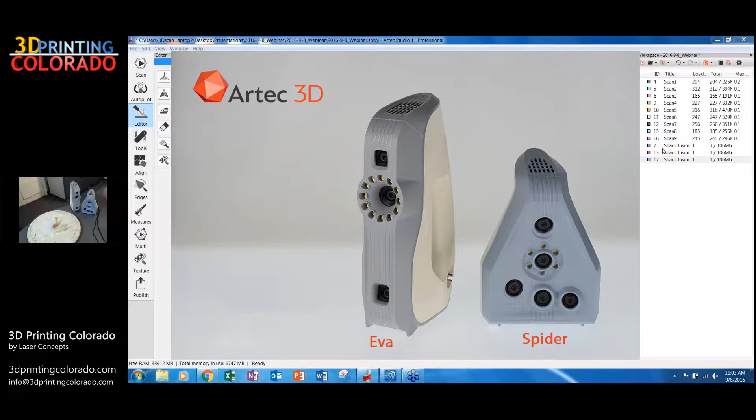So Stu, why don't you start off with going through the cameras on the scanners and kind of letting everyone know what they do and how the scanners work. Absolutely. So hopefully everyone can hear me okay. As Matt said, we'll be working with the Artec scanners today. Over here we have the Artec EVA, and right next to it the Artec Spider.

The Artec EVA is a two-camera system. The top camera here is its texture tracking camera. These are our structured light scanners, and instead of using specific sized tracking dots, they actually use texture along with some pretty sophisticated geometry tracking algorithms.

So this is a texture camera or a color camera, and the lower camera here is the geometry camera, and then the center piece here with a ring of white LEDs that you'll see flashing on the smaller scanner that I'm going to demo today, that is the actual projector, which projects the grid of structured light.

Over here on the Spider, this is actually a 4-camera system, so you have 3 geometry cameras and a texture camera. The EVA and the Spider are very similar in functionality in terms of how your user controls are laid out. They both have user controls on the back here. Let me adjust the webcam so you can see what I'm talking about a little better. User controls on the back, so you can be away from your screen or away from your keyboard to more functionally scan.

Both are point and scan, line of sight scanning. The Spider scans in a blue wavelength. It's actually a blue structured light, where the EVA is a white structured light. Both have LED light sources on the front. As I said, the 4 cameras. This is actually our projector over here.

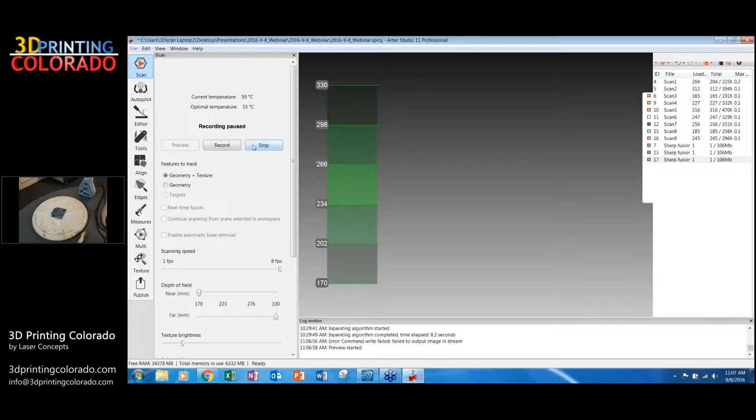And they are fully mobile. You can take them out in the field, and they do capture full color, as we'll see here in a minute. So I think Stu's going to scan that little block with the Spider. I am. That is true. Let me double check. I think I lost a connection for a second here. There we go. Just reseat that.

So while I'm doing that, the scanners are USB cable connected and have a separate power supply, both with strain relief, as you'll see on the back as I'm scanning. Here we go, initializing the scanner. Here we go.

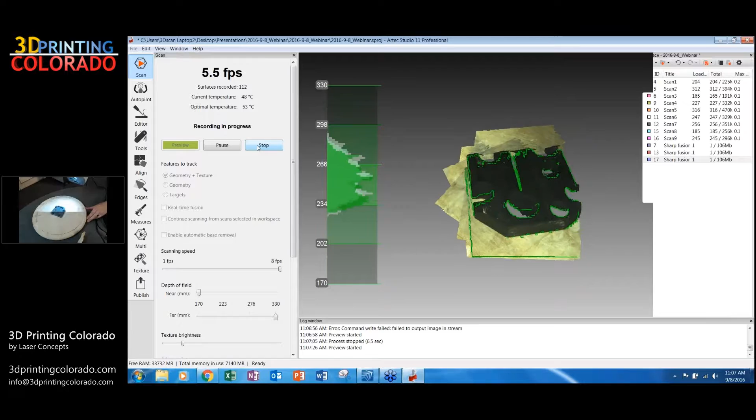So as I'm scanning here, you'll see a couple different things coming up on my screen, which hopefully you are all seeing just fine. On the left side of my scanning screen, you'll see a green bar that has some numbers and some variation in the color. The green bar is actually sort of a distance meter, and it's letting me know where I'm acquiring data and how far from my central focus point. That's more or less letting me know where I am in my scanning volume or my depth of field, if you want to think of things in terms of photography.

To the right of that is actually a sort of a preview of what I'm scanning, and within that you'll see there's a green amorphic blob, and that is actually what the scanner is bringing in. So I'm going to do one scan. We're using a turntable today that allows us to scan all the way around an object pretty quickly.

Turn that up real quick. Okay, and start another scan.

As I said before, they are line of sight scanners, so they're taking a couple different views of an object, which allows us to fully and accurately capture the geometry itself. The scanning process itself is much like spraying a car - it's a very smooth and often very quick process as I move around the object and fill in all the details.

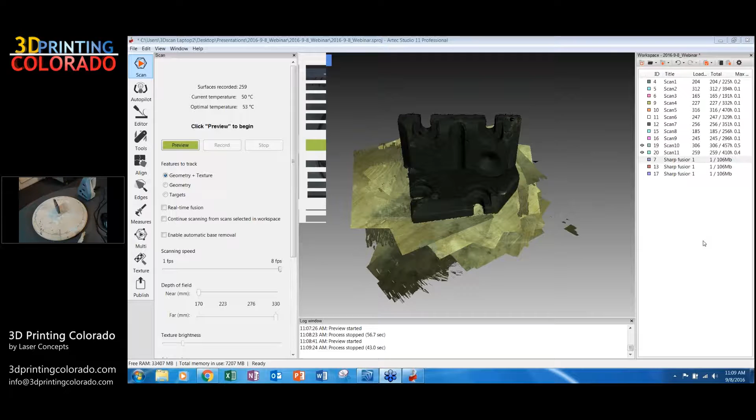Utilizing the EVA would be exactly the same as this. You can actually, as Matt said, use both in the same project environment. The EVA is just going to have a significantly larger field of view and not pick up as much of the fine details, but certainly much more of the overall size of the object, very quickly. I've got a couple scans here.

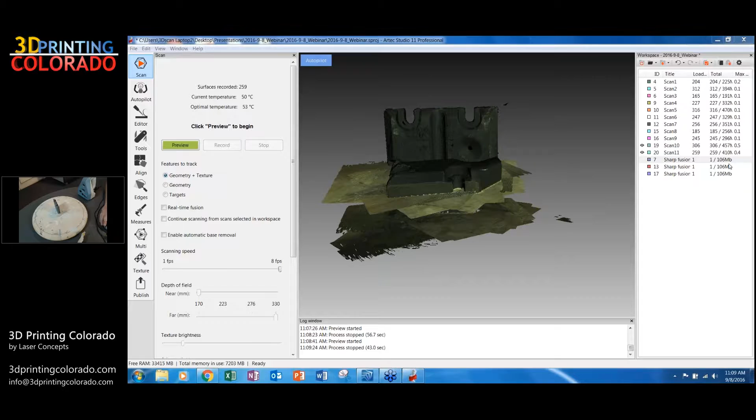This should be all I need for an object this simple. So I'm just going to run through it quickly in the latest version, Studio 11, which is what we're using now, which just came out early this summer. Artec introduced a method called autopilot to make scanning very, very quickly, and as a pro user of the software, it has made my job very, very easy.

So we're going to run through a couple registration algorithms, and then it's actually going to walk me through the process of turning these two sets of raw data into an STL or a PLY, OBJ, and so on. It's going to act like a wizard, similar to Microsoft Word, just walking me straight through with some prompts.

It also gives me really great feedback - I can click in here and it's going to give me some visual representations of what bad geometry or good geometry is. Since the scanner is primarily geometry-based when scanning, it wants to see things that are rich in geometry, with a lot of variation and very little symmetry, or at least variation in the symmetry - lots of unique geometry.

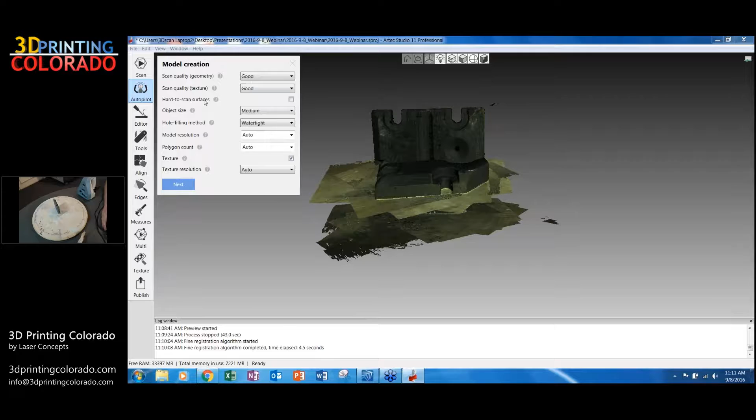So big flat surfaces are tricky, especially with something like the spider where you're only looking at about a postage stamp worth of data or area at the same time - it can kind of confuse one section of a flat surface with another. So it's going to walk me through some of that, object size, giving me some feedback.

And then it's going to allow me to put texture on this. Since we are taking full color pictures, I can make this a full color scan. Really wonderful if we're doing scanning for digital shopping - I'm thinking of scanning in full 3D models of consumer products and being able to put them up on a website and have people rotate them, view them, see things like that.

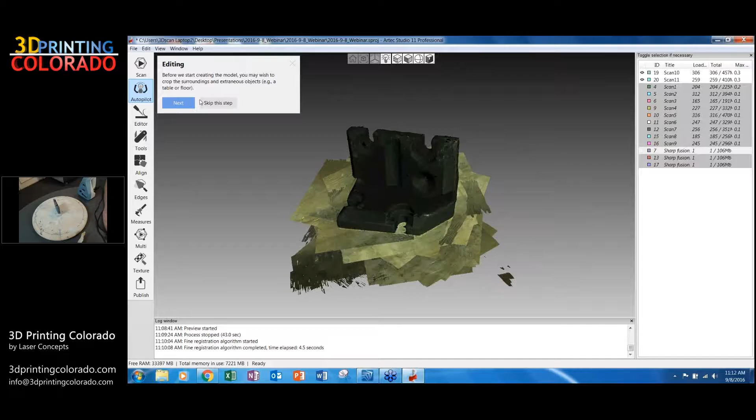I'm going to skip putting texture on this one because it's a boring gray block, and we don't want to watch a green bar go from left to right any longer than we absolutely have to. So once I have that done, I can click Next here, and it's going to prompt me.

One of the things we really feel Artec shines in is the data editing. Click here - when I captured this, I certainly captured a fair share of the turntable it was sitting on, and I don't want that in my data set. Using the editing tools here, I can quite quickly come in and use one tool that takes a sample and allows me to get a cutting plane in here. Easy as that - clean up the data.

I can come in and use my paintbrush to get a little bit more of that outlying data, a little bit of noise in the scan, just like that. Same thing with the other view.

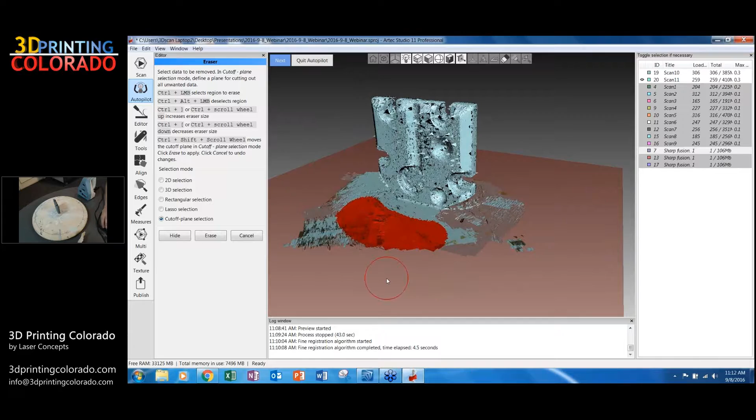In many other scanning softwares—Matt and I have been doing this for about 3 years and worked in many different scanning environments—this is by far the fastest we've worked in, and for that reason it's certainly one of our favorites.

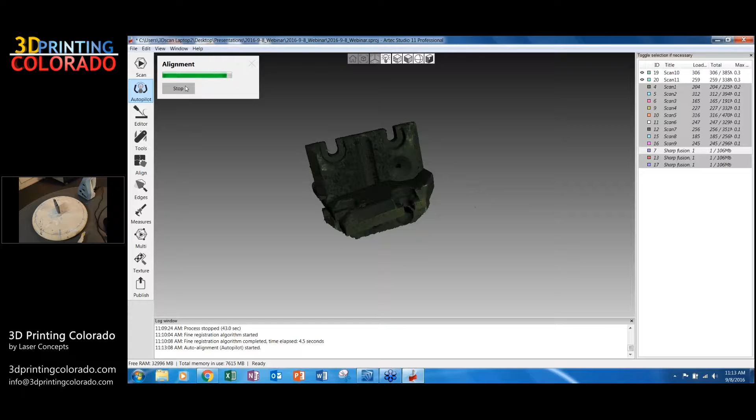This process, where Stu just spent 30 seconds cleaning this up, could take an hour or 2 hours with other scanners we've represented in the past. We're really happy, especially with the new updates from Studio 11 this year, with the auto alignment and everything else. It just makes it simple for the user, a little more intuitive.

You can also do this manually if you have tougher geometry. Sometimes the software struggles, but you can always do it manually—basically just connecting 3 common points between the scans and letting the software suck the scans together into your keystone scan. Each scan is its own individual color, so you can tell where you are in your project environment and what scan you're working with.

I'll actually show the manual alignment next. I'll do one more demo scan before we move on to the software portion. The autopilot has just made this process so quick and easy, especially for new users.

We had one of our fellow employees here at 3D Printing Colorado who was curious to learn scanning, and using Studio 11 and the autopilot, he was able to learn how to scan very effectively and efficiently in an afternoon. He can go out and use the manual tools that are walked through in autopilot because they're all still there, and you still have control over them instead of just a one-button wizard. It's a nice melding of keeping the skills and the data in your control, as well as doing a lot of the work for you.

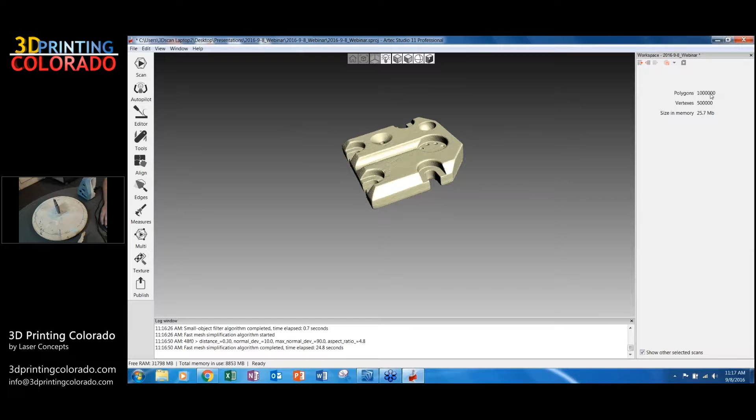So this is our metal block. We can see if I click into here, we're at exactly 1 million polygons. You can see there's a little bit of rough texture here—this is actually a painted block, so it has a lot of variation in its texture.

Stu, can you hold that up to the camera a little bit to show that all of those inconsistencies in the surface are actually in the block? That's not bad scan data—that's just exactly what the block looks like. Our high-def webcam here is not necessarily up to the task of showing it.

I can come through and actually scrub out some of these inconsistencies. There's quite a nice set of mesh editing tools within the program. I'm just going to use a smoothing brush real quick—I can come in and normalize some of this texture.

I can also use an automatic smoothing application here, though smoothing can run the risk of eliminating some features we may want to preserve. There's also a nice defeature brush, where I can go through and get rid of spots of data—this is a feature where I ran a cylinder down and out and through, and I'm just going to clean them up since we don't really need them in our next step.

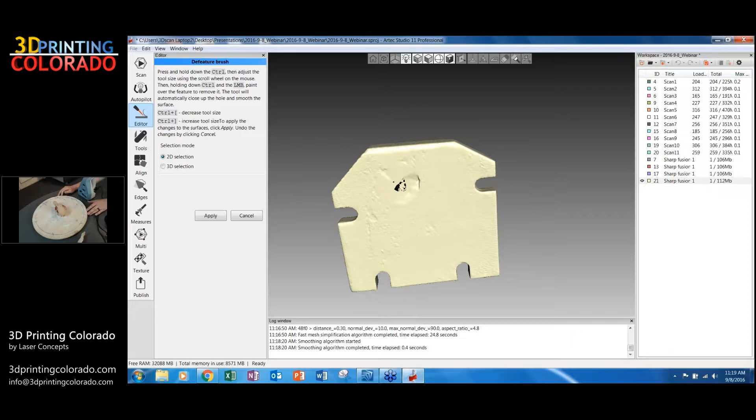Give that just a second to run. While we're doing that, I'm going to queue up the next piece here. This is actually a 3D printed hyena skull that we pulled off of data originally from the Smithsonian, I think.

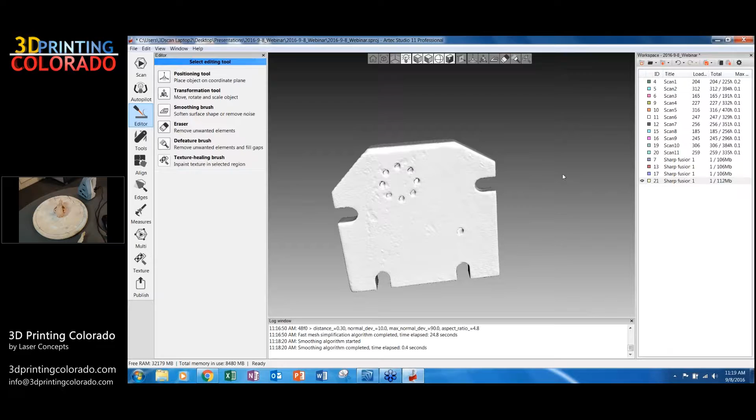So we're actually going to scan in this piece here. We've seen a lot of these scanners being used for scanning in museum collections, artifacts, and then 3D printing them so you can have them as hands-on pieces without worrying about damaging the original specimen.

So exactly like the block, just get to scanning here. Let the scanner click in.

As you can see, the scanners really don't care what they're scanning. The previous part was kind of a mechanical type of part. This is more of an organic kind of shape. The scanners are line of sight, they just really don't care what types of parts they're scanning in here.

Software's being a little slow. Often when we're running as many applications as we are, especially with GoToWebinar, it just lags behind a little bit.

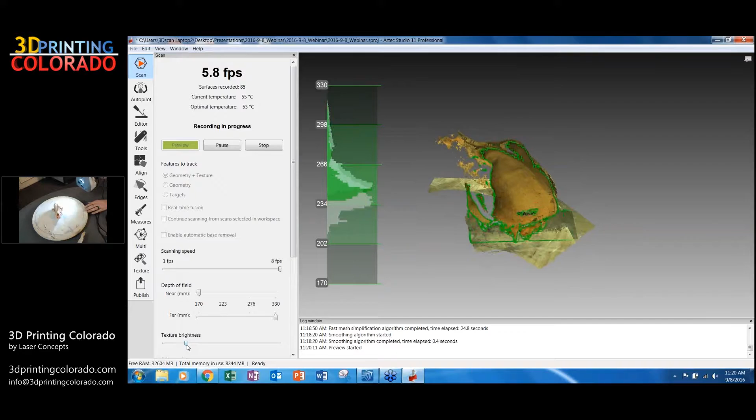I'm going to turn up my brightness a little bit just so we can see the model. You can adjust many different settings on the scanner. We won't get too much into that, but you can, things like digitally altering what would be your aperture, turning up the intensity of the LEDs to get around scanning things that are very dark in color, like plastic injection molded parts, or very bright, machined aluminum, things like that. So you have control of your scanner at nearly every level.

So we'll do a quick scan. Typical parts that are a little bit tougher to scan are shiny black parts, things like that, and machined parts, like machined aluminum parts. We have several workarounds that we work with, but the one that works pretty much the best is Walgreens foot spray. Just dusting it with some powder knocks down the shine, and you're able to scan the parts, and it just wipes off. So that's what we use.

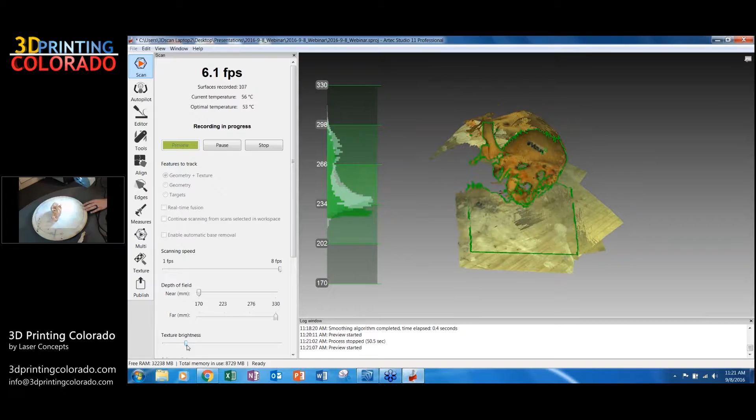Other people use children's paint, things that wash off pretty easily. But we found that the $2 can of Walgreens foot spray works pretty well for most applications if the part's a little bit too shiny for the scanner.

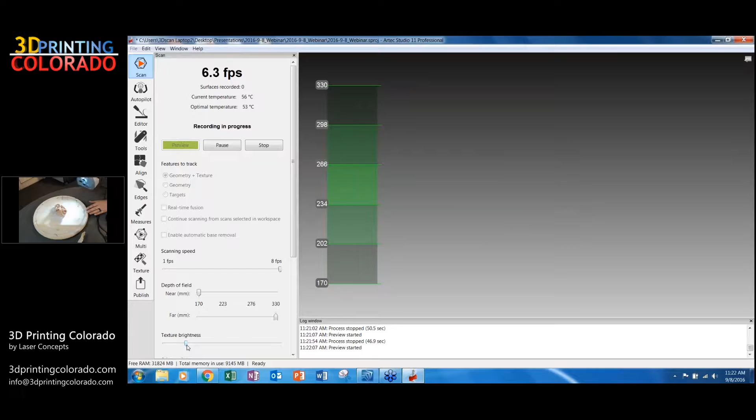So this one's a nice sample part because it has lots of nice little occlusions and hollow point spots and things that are very difficult to get the scanner down in. So it's a good piece to get lots of different angles on and show. Of course, the interior here of where the spinal column would have connected, we're not going to get all the way inside, so that's going to end up being a set of missing data.

I believe this scan was originally built with a CT scanner that the Smithsonian was using. But for show and tell purposes, this is a great data set.

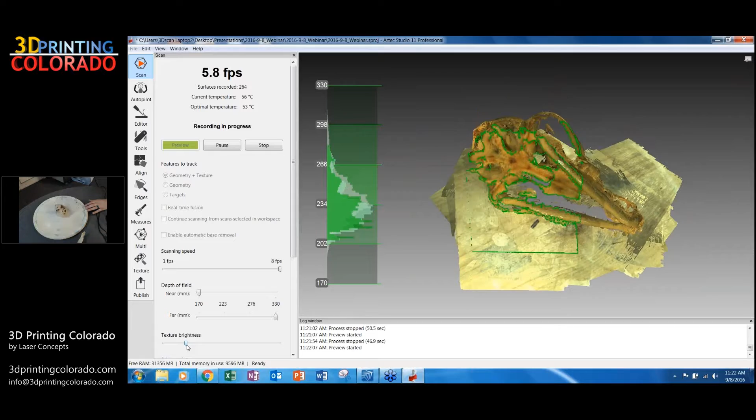For the tracking, as I mentioned earlier, the Artec scanners are full color scanners. They use texture as tracking. That's part of the reason why I have a raw wood grain turntable here, the scanners really love the variation in the wood grain. It allows me to scan hard, very symmetrical objects, and it can use the texture of the turntable as my tracking, so I don't have to alter an object or do anything.

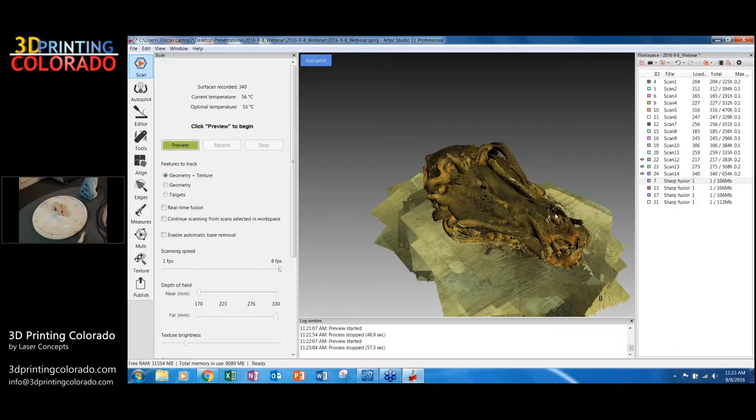This one certainly has plenty of geometric variation in it, so that's not so much a concern, but something more along the lines of this jawbone here can have some nice symmetry to it. Certainly not as much in the teeth, but some nice symmetry to it. So the wood grain helps with that.

All right, so we went through the autopilot before. I'm just going to run through the manual process and show it's all the same steps, just a few more button clicks. And click out of scanning, it's going to run our fine registration process.

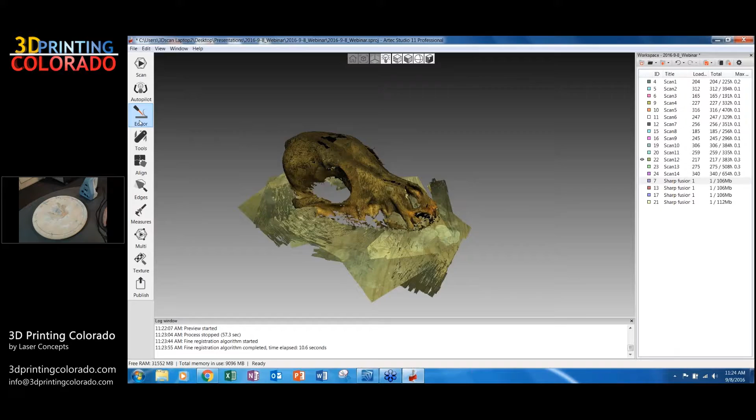Much of scanning is, as many of you probably know from the CAD world, just watching green bars go from left to right. Sometimes they're not green. In Artec, they're green. So we're going to skip right down to editor here.

Same tool I was using before. Quick cutoff plane. Actually, I'm going to skip back out, and I'm actually going to use the positioning tool. We scanned many different orientations, and if I turn on the grid, you can see that I am not aligned to X, Y, and Z. So I'm actually going to use the data that I want to delete, but it's nice and flat, so I can align this, at least get it sitting on the plane that I want it on, apply.

And now I can go in and quickly eliminate that data. Once again, that level of data manipulation is much slower in other programs.

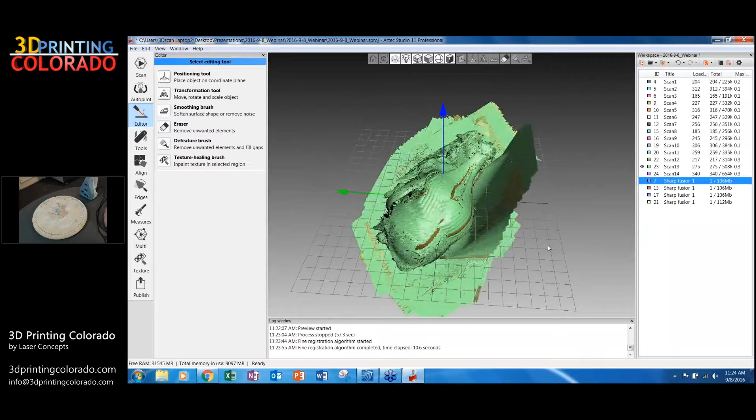And I don't have to do it with every scan because I'm going to use that first scan as my keystone when I go to my alignments.

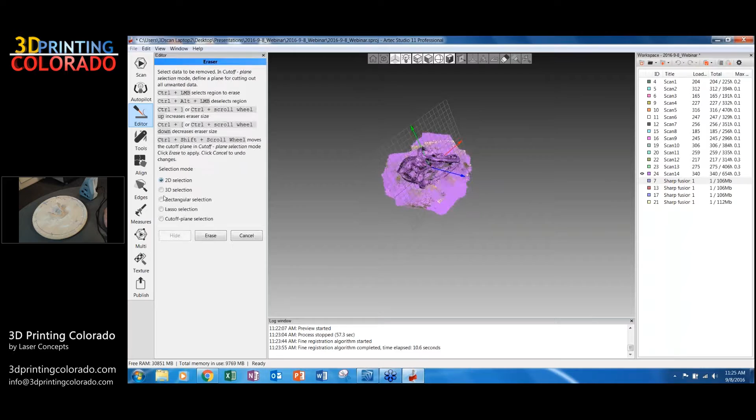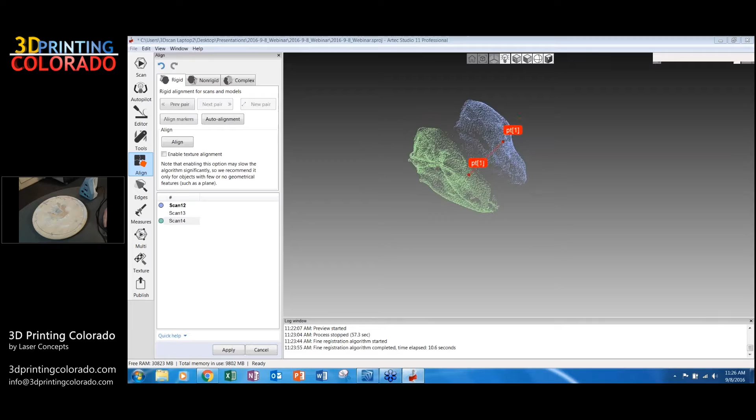Educational discounts on scanners, yes, there is a 10% educational discount for the scanners. So everything that you would need, depending on which scanner or a bundle, is included in a turnkey price. So you do end up saving quite a bit of money, roughly about $7,500 if you buy both scanners at the same time in a bundle.

Other things you're going to need is a license of Artec Studio 11. With the EDU discounts, you get free updates for 2 years. So any updates to Studio 11 you would get, but then also if you go into Studio 12 or 13 or the next updates on these scanners, you automatically get those for the next 2 years. With education you actually don't pay for the software. For EDU you get 20 free licenses of Studio 11 and then Studio 12 when that comes out.

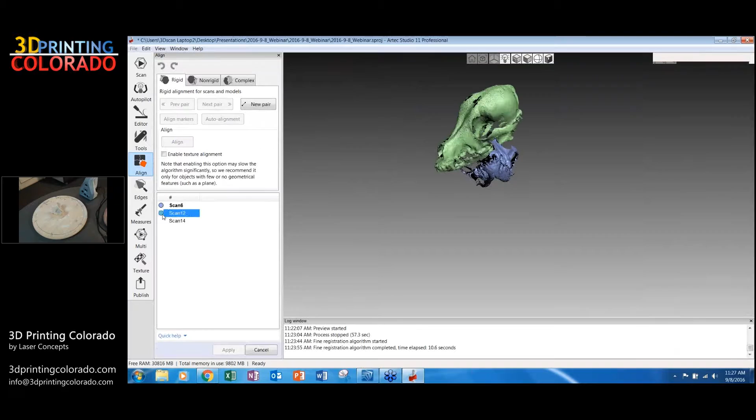So other than that, other than the scanners, you might consider a battery pack, which allows you to be mobile. And then install and training is always a big one. We either do that via GoToMeeting, what we're doing now, or Stuart actually travels on site, on campus, and that sort of a thing.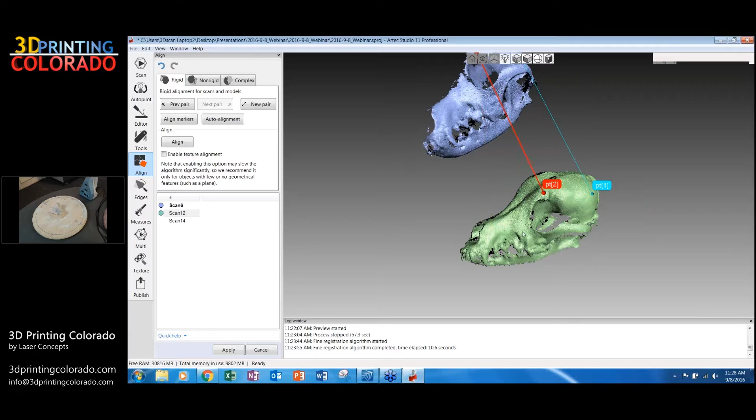Sure, I can show that. There's a couple different ways. In terms of distinguishing in the program, let me click over here. We can actually... let me get this running, and then I'll answer your question.

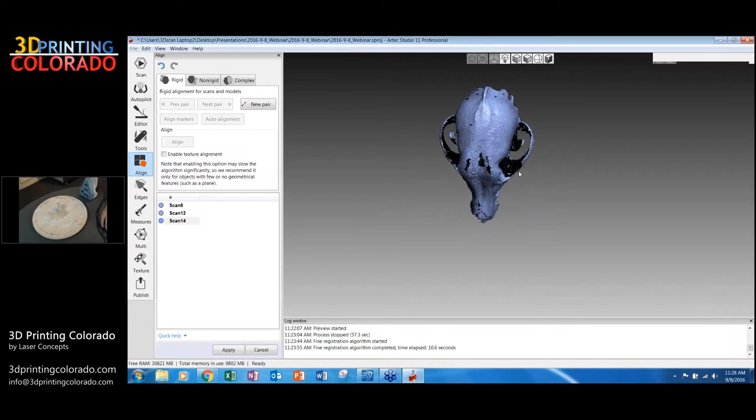I can certainly see if there are holes in my objects as I'm scanning. I can see through what comes up as black on my screen here, which is actually the back side of my polygons. The front side is assigned a color, the back side is just represented as black. So I can see it there.

I can also, if I close out here, and I'll actually hide these guys real quick. I can come in and I actually have the ability... it's up here, I can pick a plane and do a cutting plane. But Studio 11 is primarily built to show us the outside so we can get our scanning and get exported.

So what that really brings us to is our next level, our CAD software. And today we're going to be looking primarily at SpaceClaim. So I've got a few of these prepped already.

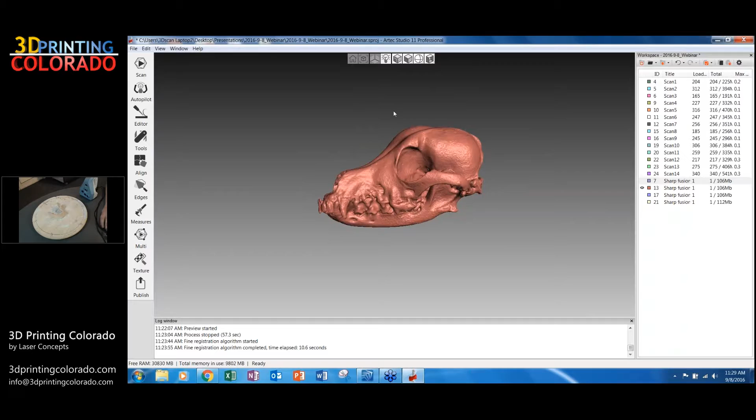Here's our metal block I did a little earlier, and one I did early in the scan. I actually went through and turned our skull here into a mesh a little earlier this morning, so we didn't have to wait for those green bars. So I've exported those, and I've brought those over into SpaceClaim. And here is actually our mesh. So SpaceClaim is a full-blown CAD.

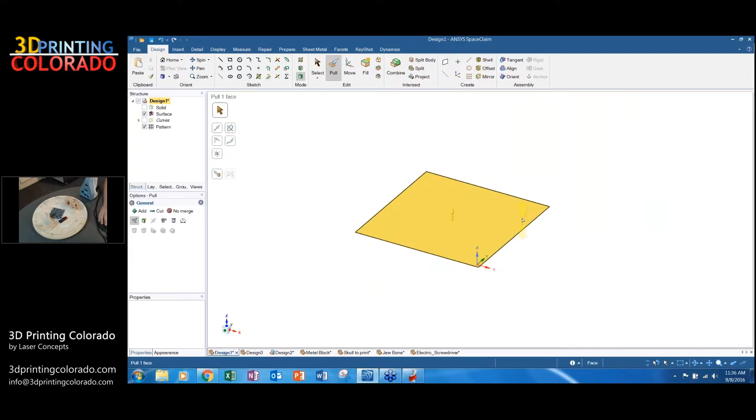I can add features, everything like that. Where SpaceClaim sets itself apart is the next step. So I just sketched and got myself a basic square here. Instead of going to extrude or revolve, they've condensed all that into one single tool called pull. I'm going to pick a surface here, which I turned my sketch into as soon as I clicked out of the sketching tool, and I can just begin actually working on my surface here.

So SpaceClaim is not a parametric modeler that stores your feature tree over here, stores your sketch and assigns parent-child relationships and so on. It is a direct modeler, so I can very quickly and easily make iteration changes, especially if I click on the right thing. It's all based on pulling. This gives you some advantages in being very quick to move from a napkin sketch to a 3D model,

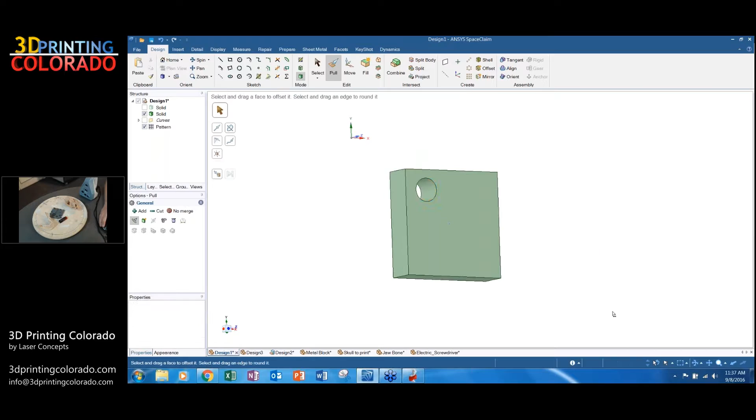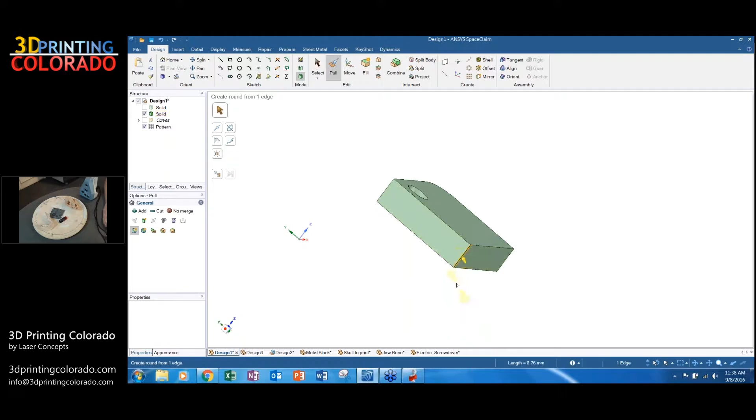but also SpaceClaim is CAD neutral in that because it looks at features, everything from faces to lines out here, corners, to easily put fillets in or chamfers. It actually allows me to bring in an IGES file the same as I would a native SpaceClaim file, and even Inventor, Pro-E, SolidWorks, and CATIA, all just able to come in here. And I can eliminate things, I can move things, I can pull things.

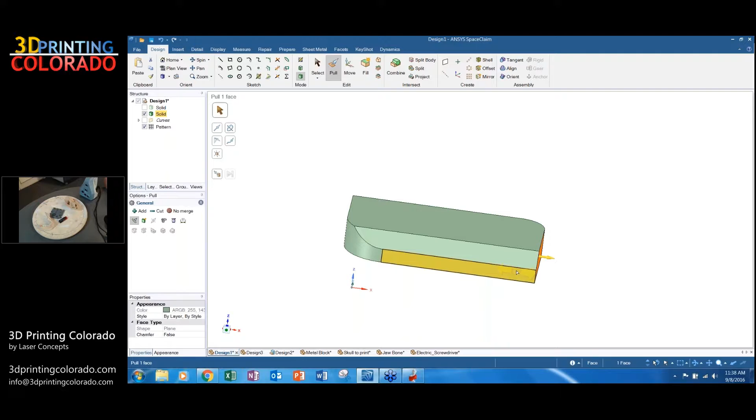So it's really a tremendous tool for machinists, CAD managers who get lots of data from different sources and need to sometimes adjust things and are worried about collapsing feature trees and so on. One of the big reasons that we really love it in-house here is its ability to do reverse engineering very quickly and cheaply. It's the cheapest option we have for reverse engineering. It also allows us to manipulate meshes like no other software that I know of. This is our metal block. I imported it as an STL.

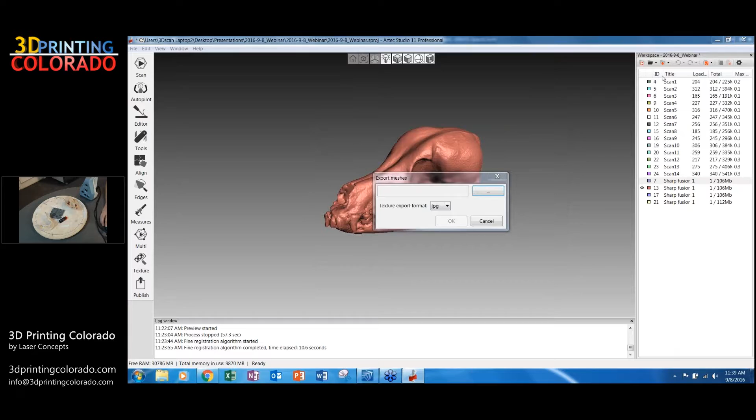So this is our metal block, which I exported as an STL earlier. SpaceClaim actually has what they call the Facets tab, which are some tools primarily for prepping STLs for 3D printing, primarily FDM 3D printing. It has some basic tools in terms of checking meshes; it's going to tell me if there are any holes, give me some feedback, how many vertices. No problems with this piece of geometry, which we would hope not. So I could ship this off to my 3D printer, no problem.

I could also come in here and I could shell it. I could tell it I want it to be 1 millimeter. Run that real quick. The shelling program in SpaceClaim is quite tremendous, and we use it quite a bit in terms of prepping things for 3D printing. A lot of 3D printers, you want to save as much material as you possibly can. Of course, it's not going to like to do it for me here.

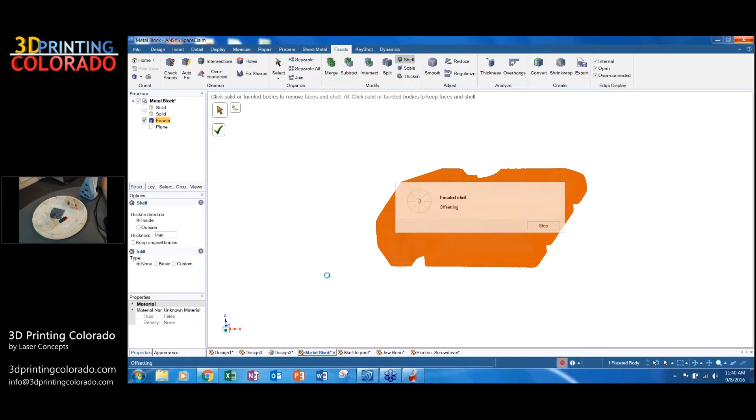So one of the questions that came up earlier was how do I know a body is hollow or something like that? I can actually work with the STL here just like I would a normal solid. I just struck a cutting plane through here, so I'm looking at a cross section of my scan, and as I'm going through my cross section, it's showing me the geometry of that area. It's doing its best to represent things as lines and mostly splines, and I can see little bits of inclusion here where a bit of bad geometry got mapped in.

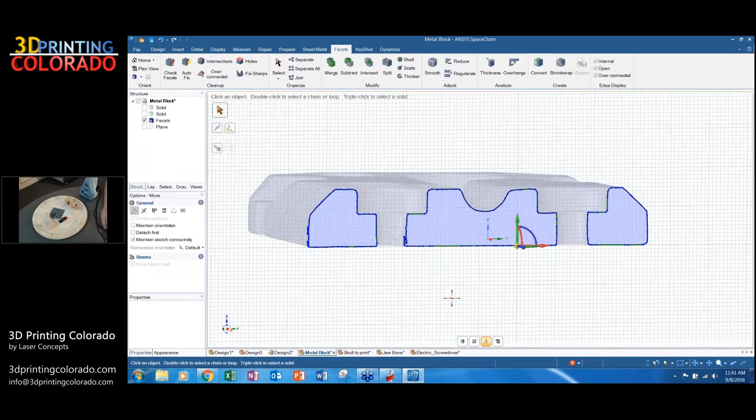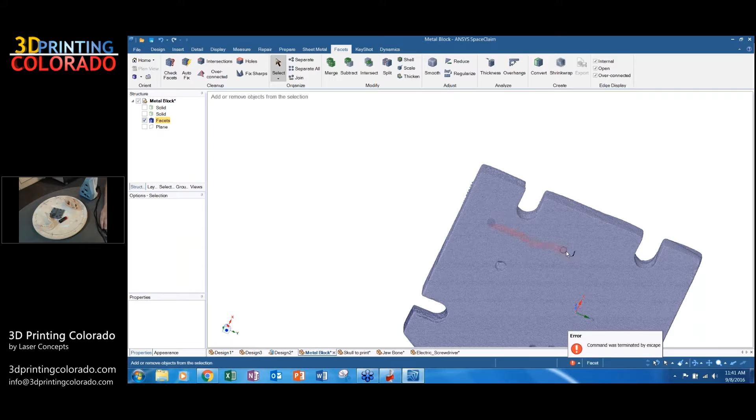This then allows me to grab my paintbrush here. Oh, nope, excuse me. Take a sample of this here, and I can actually put a plane on that. So I just took a sample of the actual mesh data there and put a plane on the average of it. I'm going to move that plane up through the center of my block here. And going back to my cross-section tool, pick that, go to normal, and come back in, and it's just like I would if I were sketching from scratch.

I can start turning this into a solid. And you'll see it is giving me constrained feedback. I want that to be 90. And I can fit this out here. Corner tool.

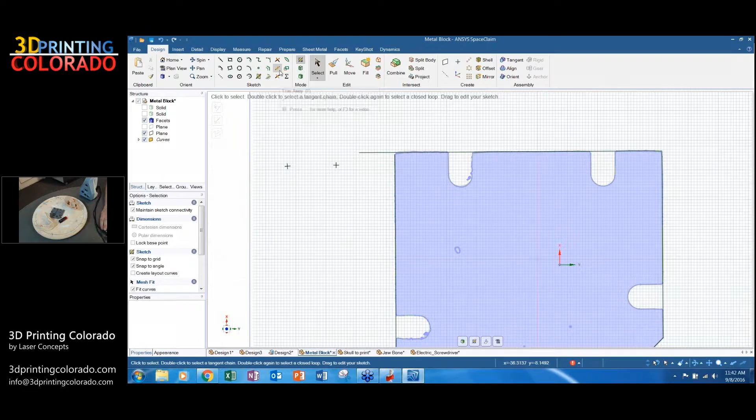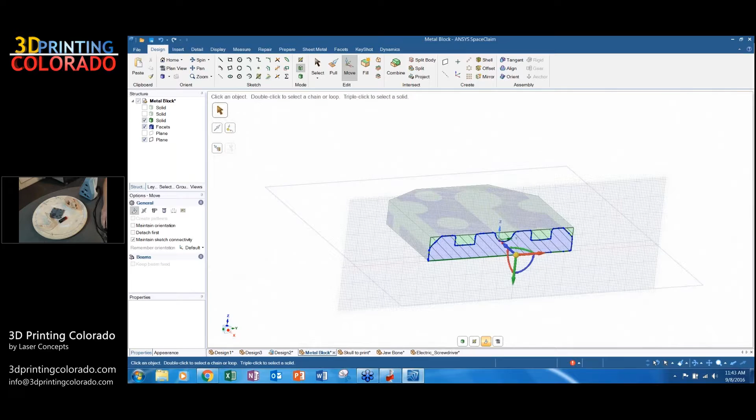So I've got my basic shape there. Going back to using my pull tool, I can then begin to fit my block. SpaceClaim is a little different in that I want to build something out and then just eliminate what I don't need. And from here, it's repeating the same process as many times as I need to establish my geometry. I can either come in and create this line using sketching and cut this off to get this piece here, or I can actually just grab this and pull the geometry to where I need it, and we can certainly get a best fit there.

Pull. I'm using what we call the up to command, where I can pretty easily make all my features match one feature that I've already mapped. And it is not letting me select that. So we've started to work on our block. This is all well and good. This is going to be very similar to a lot of other reverse engineering programs: sketching, constraining your sketches, and then making it match.

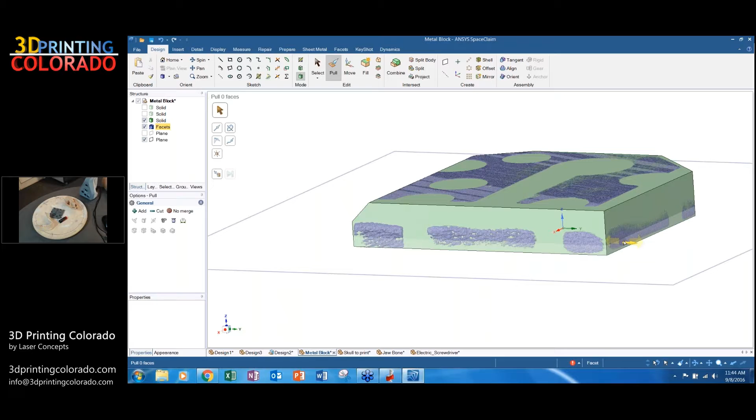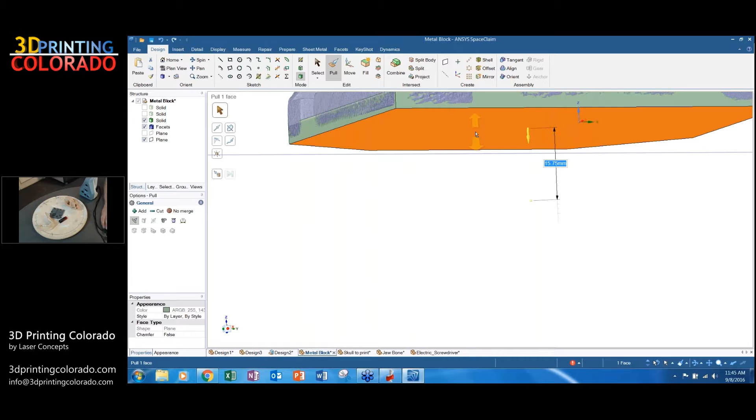Where SpaceClaim sort of differs is actually being able to take sketches and solids and change and alter meshes with them. If we were bringing this into the 3D printing world, and we actually just wanted our model to be a little different, I'm going to eliminate this feature. I actually wanted to thicken this out by, let's say, 10 millimeters. And let's say make it a little wider here. And we'll just do a quick sketch here and add a feature.

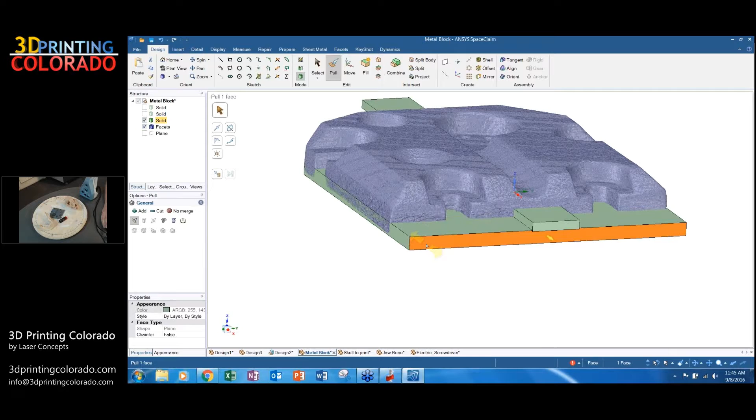I've thickened my base. I've added a piece that I'm actually going to turn into a key channel on the bottom here, and separate those into two pieces. Turn on my mesh there. So I can come in here and just merge my two pieces, and that should allow me to add that solid to that base there.

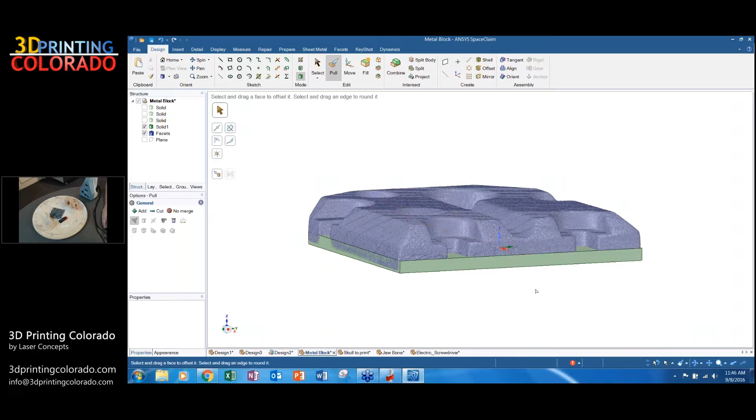And Stu, we got a question here. Absolutely. Why do you need to reverse engineer and create a sketch? Can't we just use the scanning geometry for our analysis? You can. It very much depends on what you're trying to accomplish. If you are looking to make iteration changes to a legacy part, or even if you're looking to make a set of documents, CAD drawings for parts that don't have them, you will need to make it so you can call out dimensions, or maybe you need to change dimensions and so on.

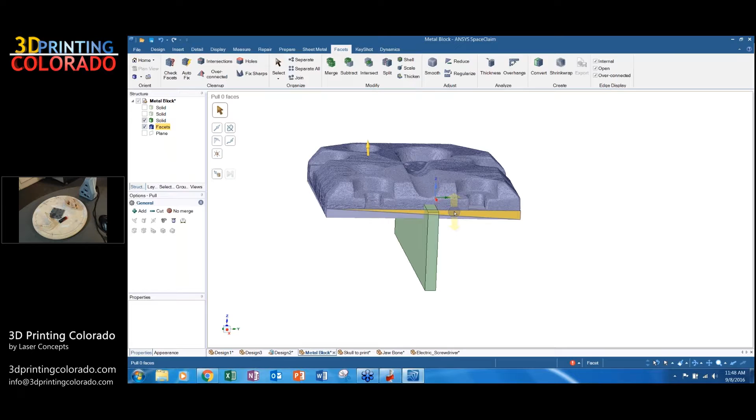That's where the reverse engineering, or what the industry really prefers, documentation, comes in. You can use STL data if you're going into things like finite element analysis, or even if you're just scanning a part and you want to compare as manufactured to your CAD. You can do that with just the scan data. This is more to take you to those next steps. Yeah, we use a different program called Geomagic Control for the scan to CAD comparison. We're not demoing that today, but we will probably be doing a webinar in the near future on that program.

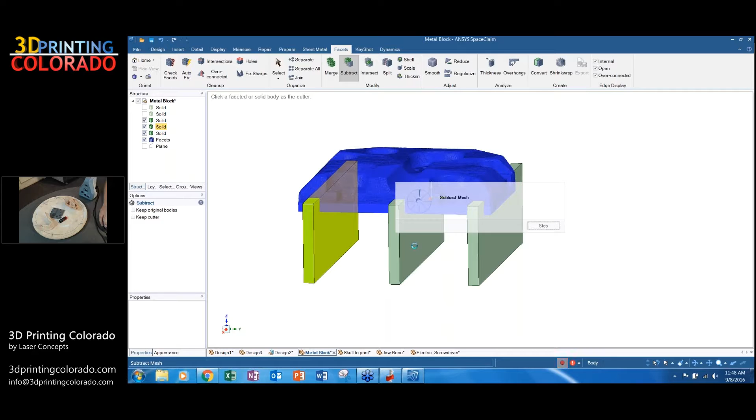There's also another question here. Is there a way to turn an organic mesh into a solid versus sketching on the scan data to create a solid, such as with the scanned hyena? Yeah, there are other programs that we represent that we are not demoing today. So Stu, why don't you talk quickly about those other programs? Absolutely. We have two that we work with primarily. One is called DesignX. It is a parametric-based modeler produced by Geomagic, which is a subsidiary of 3D Systems.

It looks exactly like what you're probably familiar with if you're from the parametric world. You sketch like you do in SolidWorks, extrude like you do in SolidWorks, and everything like that. And it allows you to bring in the STL data, much like I did here, and begin working on it, but in more of a parametric fashion. There's another very similar parametric modeler called DesignWorks, and it is actually a plugin for SolidWorks, Inventor, and so on. It isn't a standalone program like SpaceClaim or DesignX, but sits as a tool on your toolbar that allows you to import STL data and build your data in native SolidWorks format.

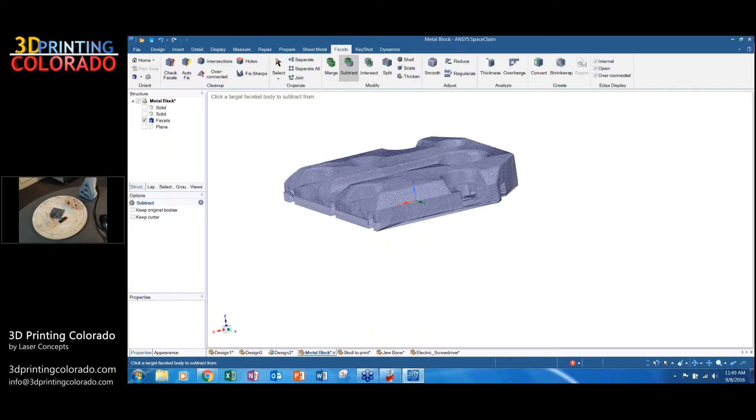So all I wanted to finish, and I will get to the organic here absolutely next. All I wanted to show you is here, I just merged these here. I've cut these channels through, and if I were continuing to work, I'd go through and recut my clearance holes and everything, but this is now a 3D printable part. I can send this to the 3D printer, and as an STL I can also send it to, there are now several CAD CAM programs that will derive their tool paths and everything they need from STLs.

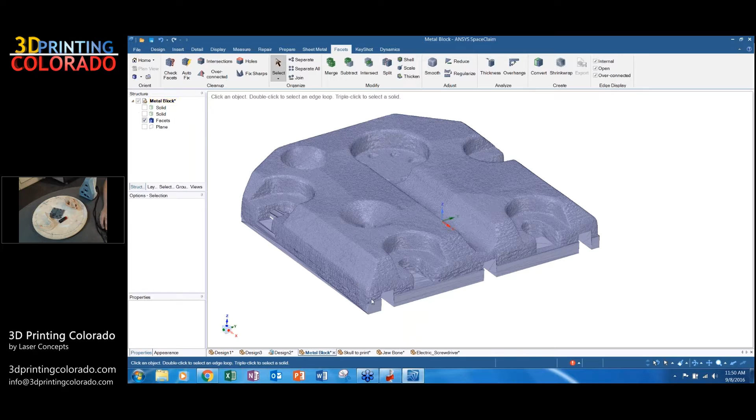Or if you're using some of the older ones, you still need to take it to a STEP or an IGES, which you can keep continuing through the sketch and extrude and everything like that. So clicking over here to our skull, the question was about organics. Organics present a little bit more of a challenge. There is actually an option here to convert to solid. It'll do its best to basically wrap a NURB surface around the piece here and turn it into a solid.

With something that is this organic, that can really be a problem, and we certainly don't want to sit and watch a wheel spin around. So instead, I'm going to move to a new tool that SpaceClaim introduced in 2016, which is the Skin Surface tool. And this allows me to do much of what I described the Convert Solid tool does, but actually gives me some control over what I want to convert.

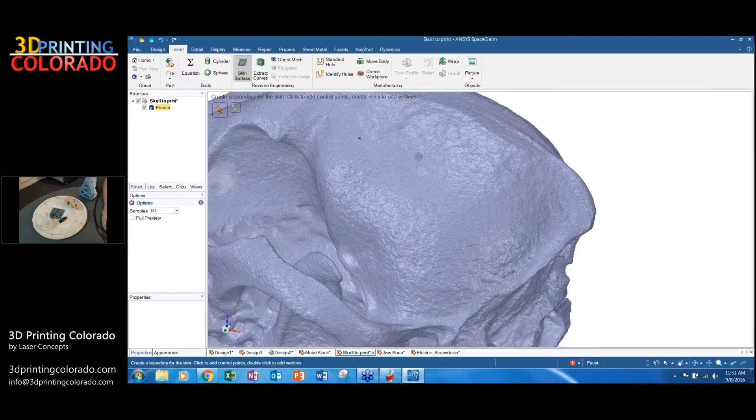And I'm actually just drawing a grid on the surface here. It's going to give me a node network, and I can change the node network up and down, but it's going to allow me to create surfaces on the mesh directly. Get the patch created here. And hide my facets. There's my node network, excuse me, is now a surface. You can see if we get in close, it's actually picked up a lot of the variation in the texture on the skull itself.

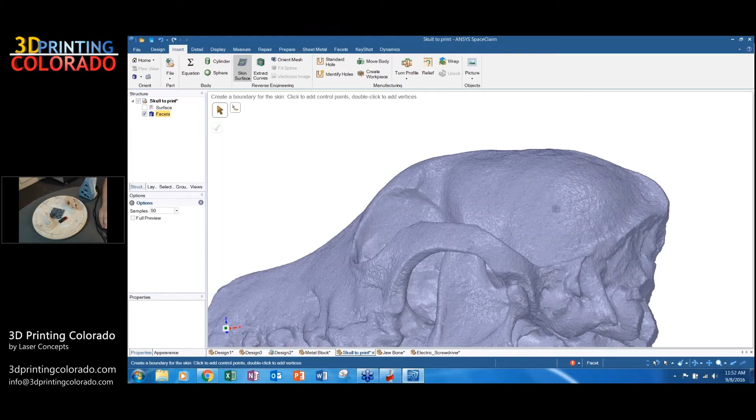What I would do if I were going to start recreating this and turning this into a STEP file would be to go through and clean all this up. Now, it can be a lot of work if you're trying to turn this whole thing into a patch network, a surface network. What we primarily use SpaceClaim for, and this tool in SpaceClaim, is to prepare basically jigs and fixturing for either 3D printing or sort of next steps of manufacturing.

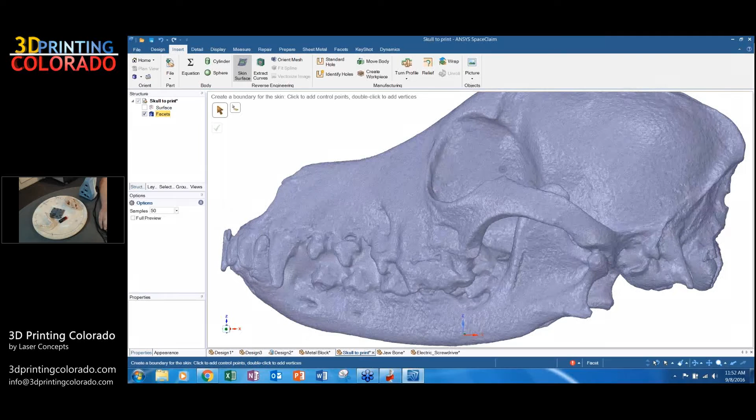You saw me create some geometry and bring it up. You can do the same thing with the surfaces. If we wanted to give this some supports, we could build in supports for 3D printing, or I can actually use my surface here as a cutting tool. Let me show that real quick. Yeah, let's keep this one here. Let's skip over to the jawbone here because this is a really great one. I can come in and using my organic shapes here. Oops, not that one. How about that one?

Any other questions while I'm showing off some of the functionality here?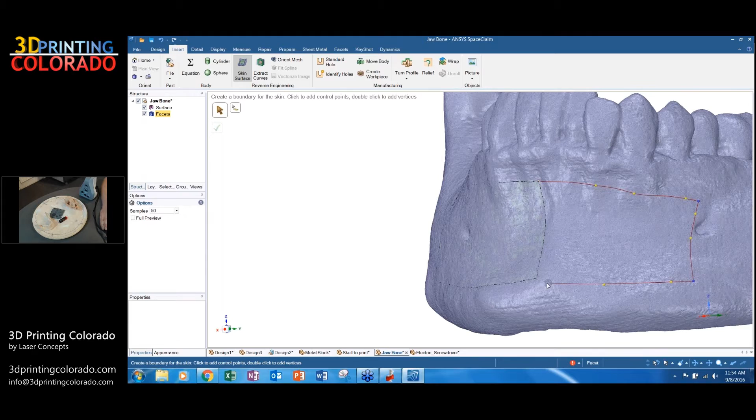The question was asked back before about educational pricing. There are also educational discounts for SpaceClaim. I don't have the pricing in front of me, but I know that they are pretty significant discounts. SpaceClaim just generally is about a third to a half of the price of SolidWorks, if people are familiar with that. So fairly inexpensive to begin with.

With the EDU discounts, I know you get either 10 or 20 licenses for the price of one, something like that, or even bigger discounts than that. And if anyone has any specific questions about pricing, feel free to just email me, or I will be following up with you guys here in the next couple of days.

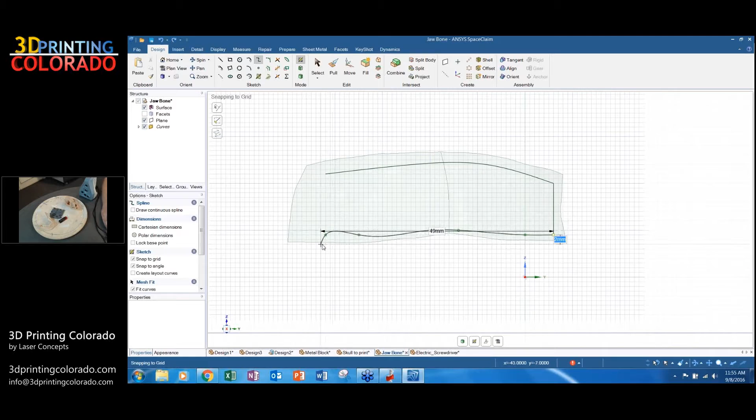Stu, why don't you explain to everyone the process you're going through right now, what you're trying to do. Sure. Yeah, absolutely. So all I did was I went and built a couple of surfaces on the front of the jawline here, and then created a sketch plane just a little further out from that. Just sketched a little bit with a spline, and then brought it up through my surface files, and then cut that.

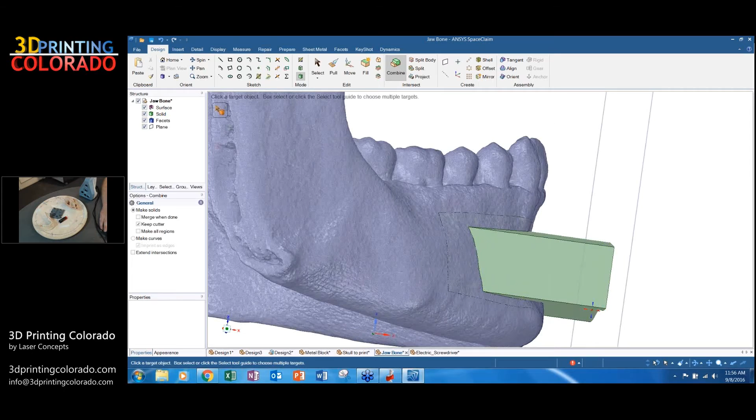Used those surfaces to cut the solid that I created, which allows me, you know, this could be a fixture. As I pull that out, it's going to continue out though, so you can kind of see here. Let me turn off this guy and this guy. You can kind of see it's actually made that imprint in my solid geometry, including this little bubble here as it transferred that over from the jawline there. So what we use this, excuse me, Stu.

We use this tool quite a bit. One of the hot new things in 3D printing is printing out injection mold tooling. So you can take scan data, say for this jawbone, and if you wanted to do an injection molded part, you could do the negative, put a box around it, and then slice it in half, and then take out the jawbone, and you've got your top and bottom side for injection mold tooling.

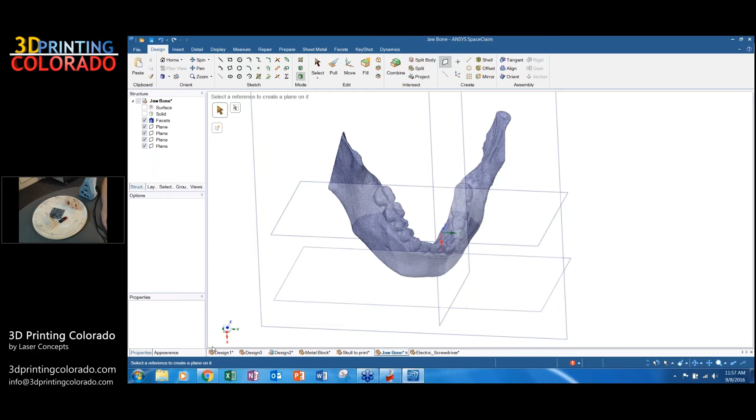We've been using a printer called the ProJet 3600, and specifically a material called M3X, where you can create your own tooling. And that's kind of one of the hot new things in 3D printing this year. So we use SpaceClaim to create the molds for that 3D printing. I can kind of show that. We'll just take a quick impression of the teeth real quick here. Make sure we got all of them.

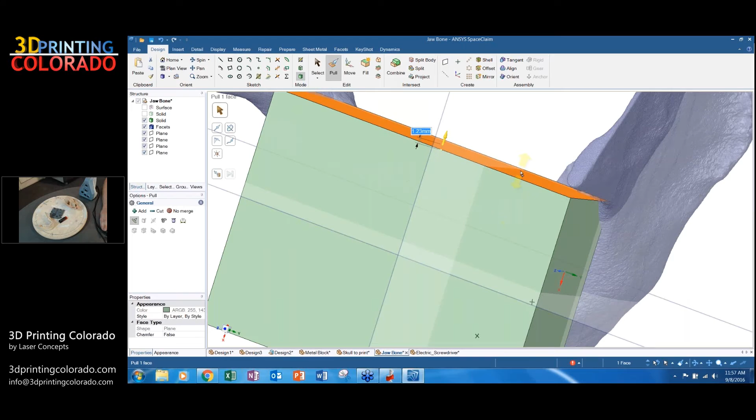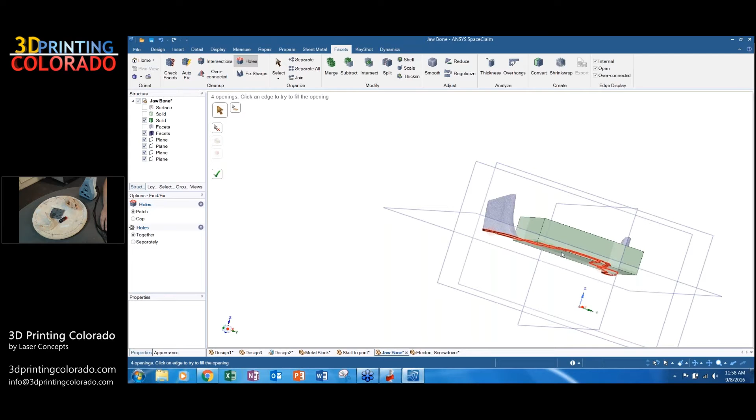Oops. There we go. So all I'm going to do is convert my rough box here, and it doesn't have to stay a box. I can come in and kind of optimize my shape. Match the geometry there. Maybe bring this guy in to there. And of course, it's often quite difficult to see what you're doing.

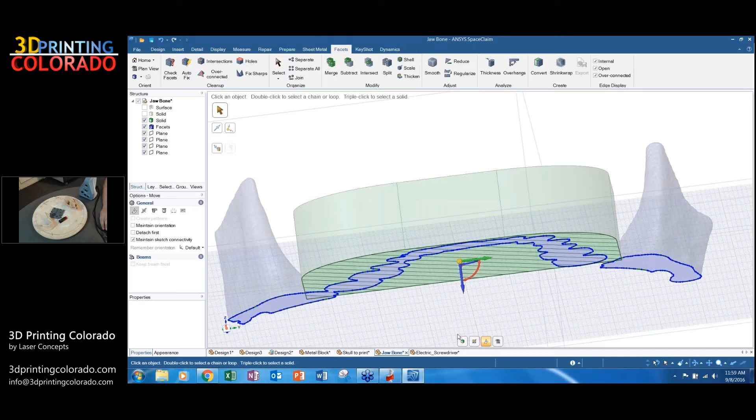So if I wanted, I can go back to my cross-section tool. And I can actually work on my solid geometry in the cross-section tool, which is one of my favorite features of SpaceClaim here. So once I've got that, I can go back to here. And I can just convert this guy to an STL, because we're going to print it. I can subtract the two shapes. And that'll take just a few seconds.

Any other questions? Well, oh, look at that. That went a little quicker. So, and there's that. There's our shape. Clear up the screen with our teeth. I can now take that and I can export this as an STL, 3D print it.

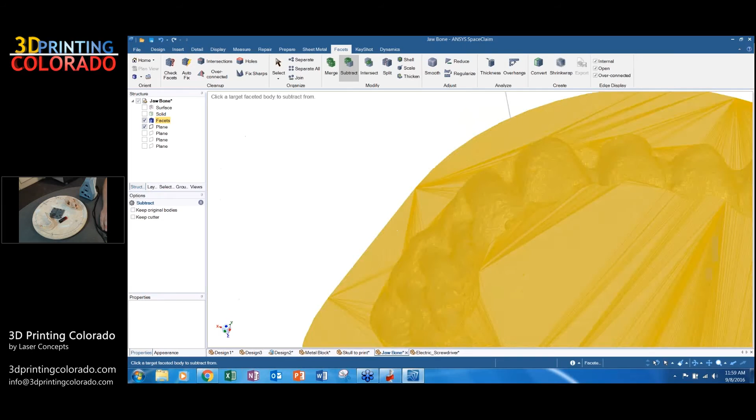I can cast impressions off of this, or we can then begin to build a mold around this, or something to take it all the way through to, as Matt said, an injection mold, or whatever steps we want to go to next. And that's really what SpaceClaim is: those next steps between your scan data and then making your scan data work for you. Any other questions? Anything anyone would like to see or hear about?

SpaceClaim, just as people are writing out their questions, SpaceClaim is a fully functional CAD program. The Facets tab is certainly the 3D Prep and the STL manipulation tab. There are also KeyShot and Dynamics. You'll see up here, KeyShot is a rendering program, a third-party rendering program that's built into SpaceClaim. Dynamics is a physics and analysis program.

We can also do sheet metal, ability to load in K tables, customize everything, build sheet metal. There are also repair and prepare tools for importing broken IGES and STEP files and preparing things for the machinist world, as well as just a good old-fashioned CAD program. Loft, sweep, revolve, everything you can do in every other program you can do in SpaceClaim as well. Without digging in too deep, there is a lot in here. So if someone would like to see SpaceClaim attempt to do something, we're more than happy to set up a one-on-one demo.